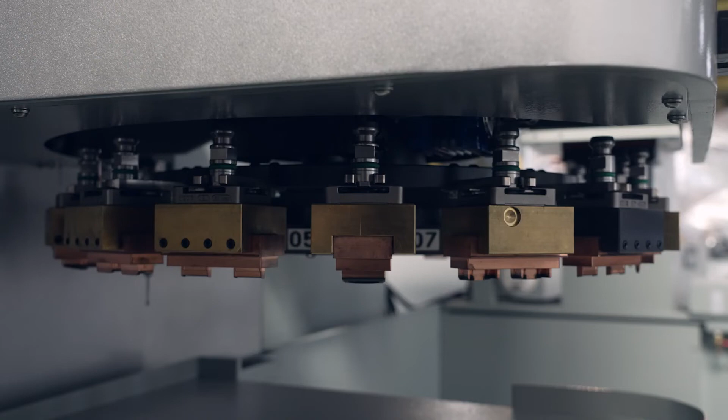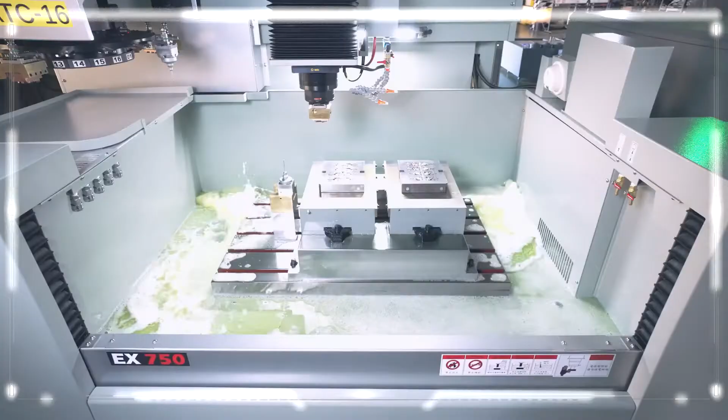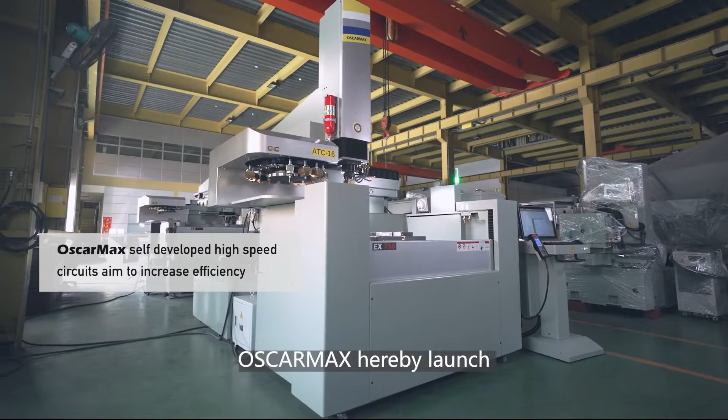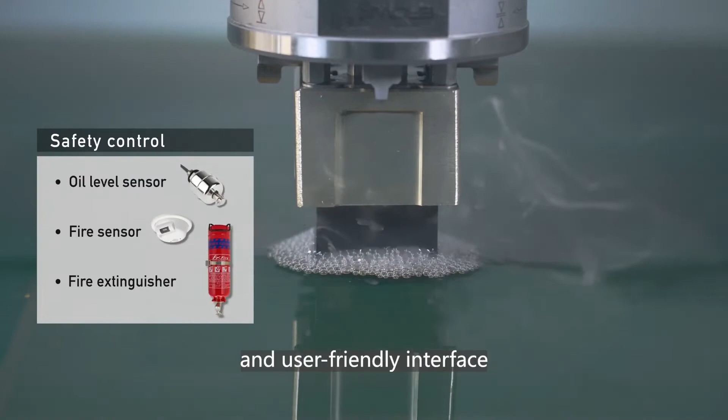With constancy of developing, testing, and improving, OscarMax hereby launches the latest sinker EDM. A combination of strong, rigid machine body, EtherCAT ultra-fast communication system, and user-friendly interface brings extraordinary performance.

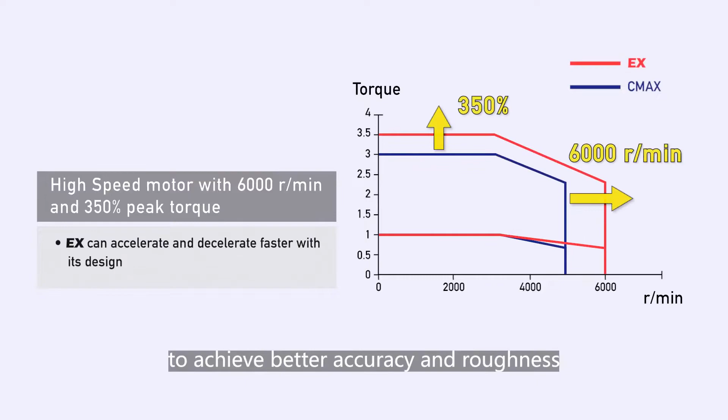Prompt response between driver and servo motor to achieve precise positioning. Stable current output to achieve better accuracy and roughness. With self-designed user interface running on Windows 10 platform.

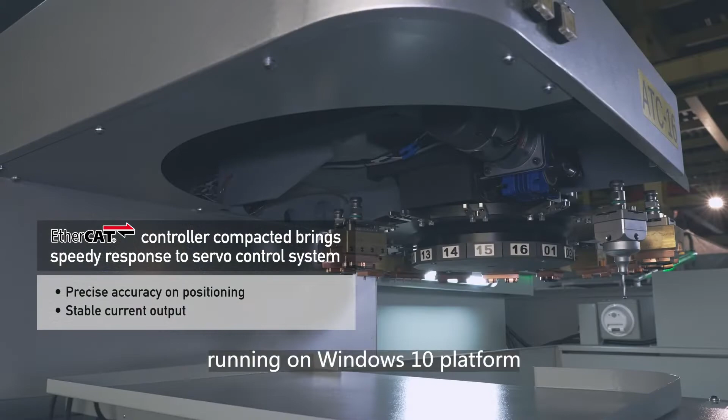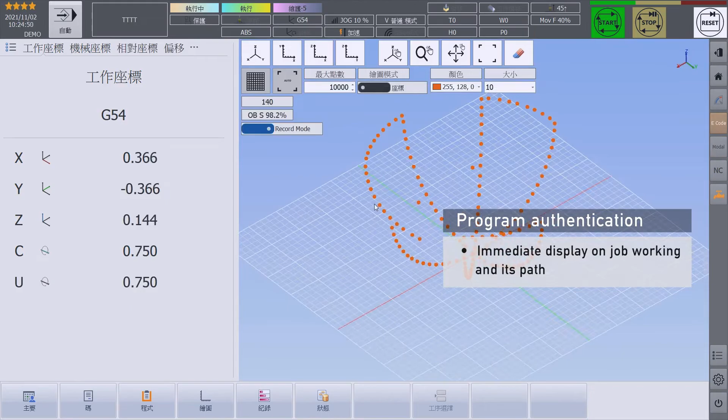Through API, eligible to process CAM software output, bringing the prep time and possible human error to a minimum. Eco Standby Mode, equipped with a motion sensor for power saving.

Interface with graphic 3D icons and conversational program guide for faster and easier operation, with 2 touchscreens designed for better ergonomics.

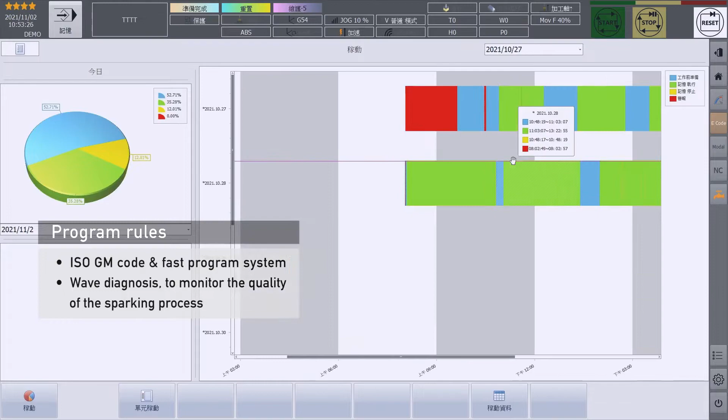All series are designed by parametric software ePlan, Creo, etc. to integrate with the production team and satisfy our customers' requirements.

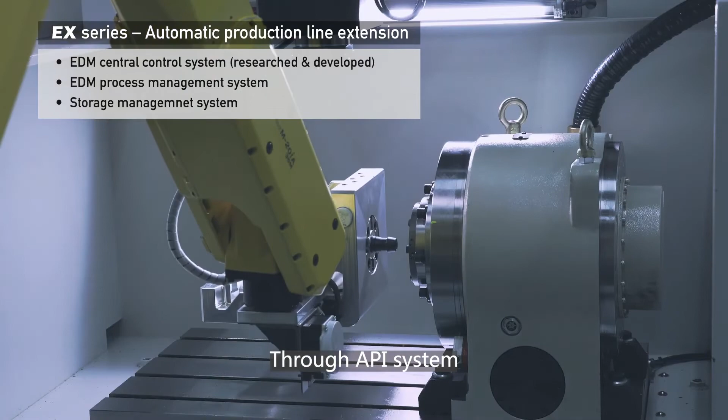Ready to link automation, connect with central control system to create an automatic production line. Through the API system, it can be easily compiled to other platforms as well.

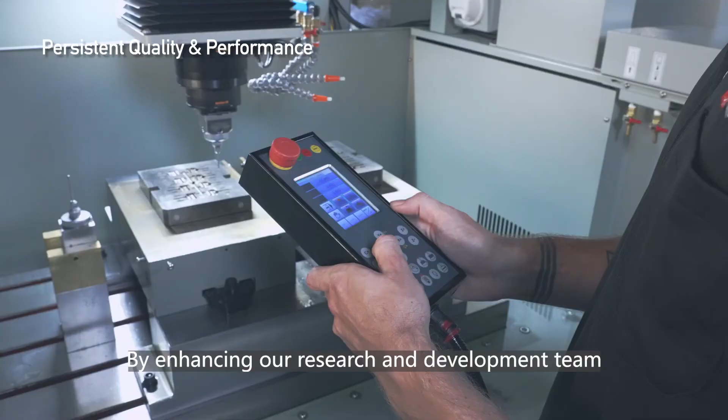By enhancing our research and development team, we aim to continue improving our EDM to meet your requirements. And we believe that together we bring the industry to a new generation.